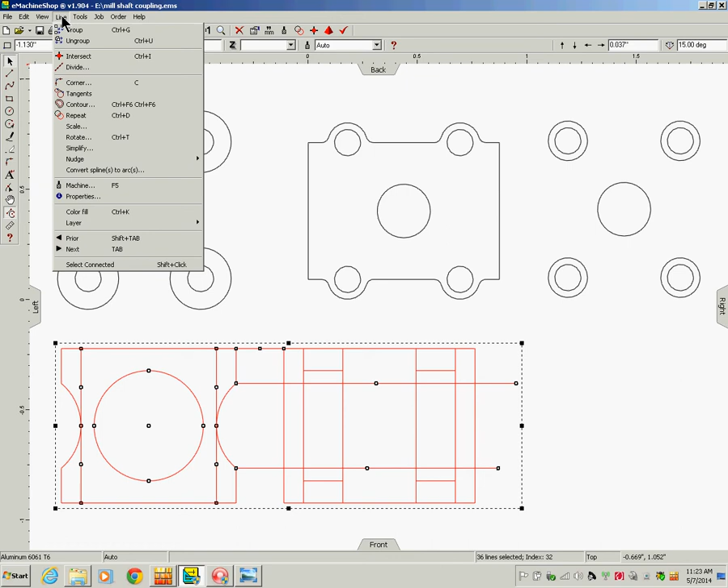So then I'm going to select all this here, go line intersect, and then delete out the lines I don't need. I'm going to hold the control key down and select each line that I don't need.

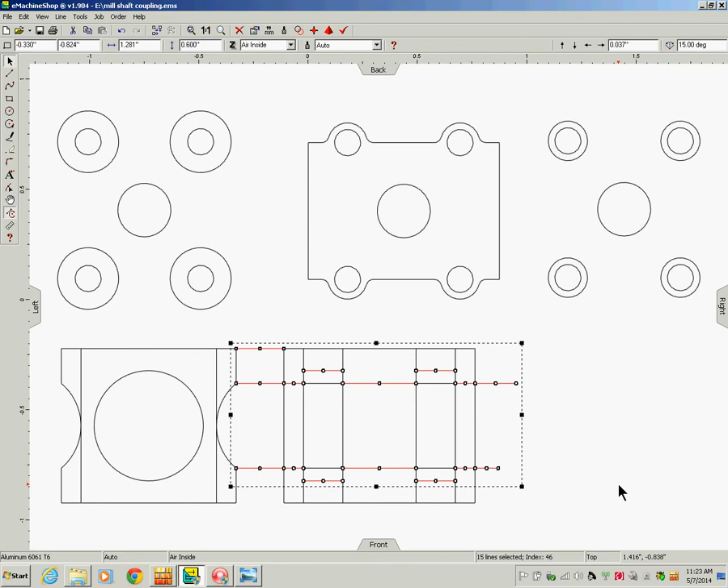And let's see—don't need this one, don't need this one. Alright, we'll delete off those and see how it looks. Alright, that fixed that. Then I'm just going to select this and regroup it, and move it back over.

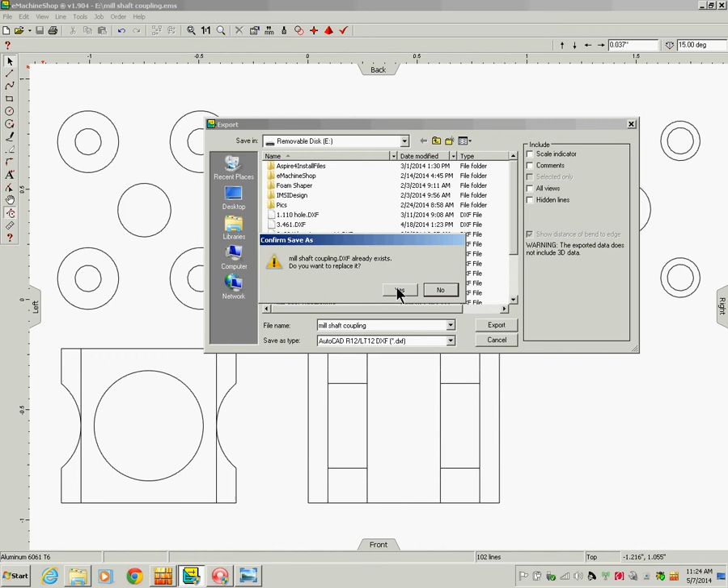So I'm going to take now and save the file. I can just now click save. And then I'm going to export the file with the same name, replacing the other one. Alright, so now we'll go into D2nc.

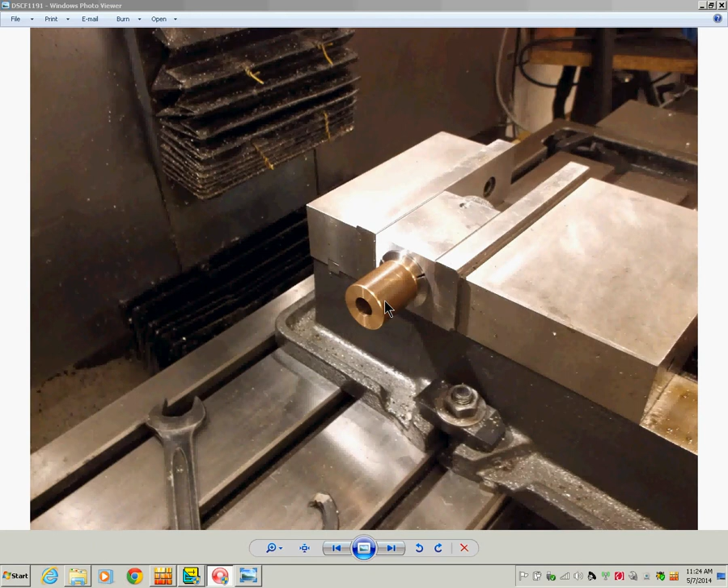Just a quick note, I brought this up to show that what I'm going to do is I'm not going to show all this. I'll just take another photograph afterwards. I've got this in a collet block, and I'm going to square this off.

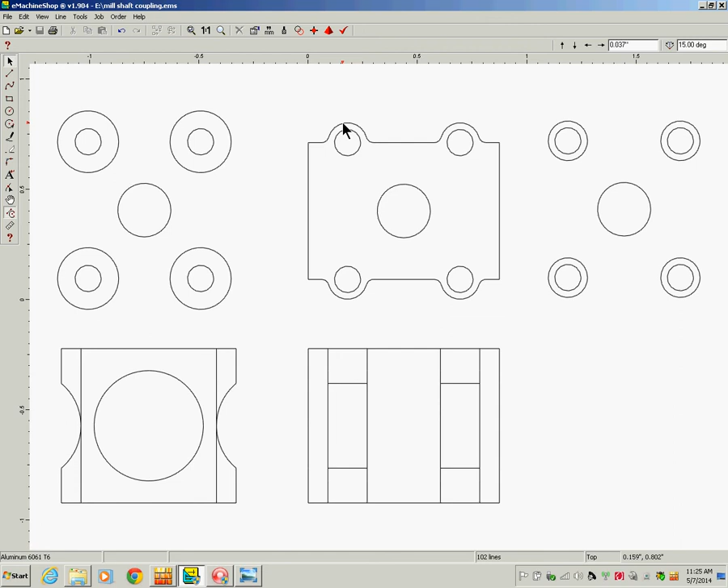The actual block I need per the drawings is 0.8 by 0.7. I'm going to mill this down manually just to 0.850 by 0.750. That way, when I actually mill the part out, I don't have a chance of leaving flat spots on the tops of these radiuses for just the slightest little discrepancy when flipping it over. If I actually made that block 0.8, there's a chance I could leave a flat spot here, so I'll make it 0.850.

So we'll go into D2nc now, if I can click on the right thing, and go ahead and open that drawing. So you click on CAD, import DXF file. It's called mill shaft coupling. I'll open it.

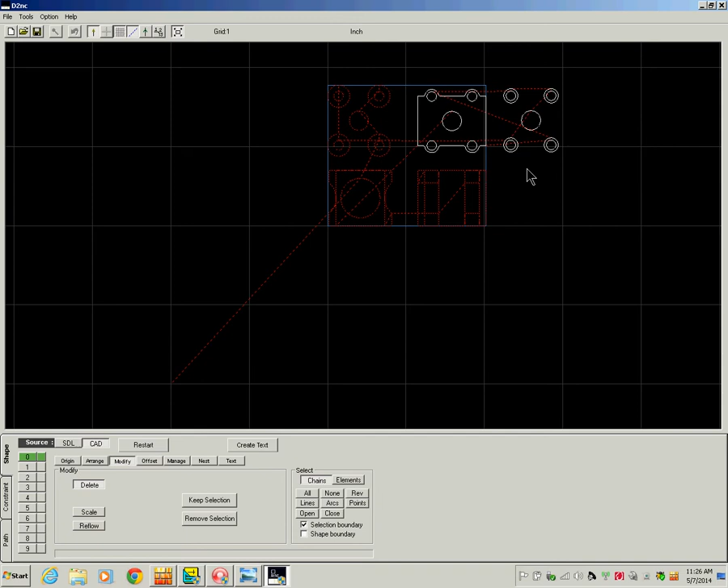It has all of the drawings, and the only one I'm actually going to be working with for making G-code is this drawing in the top center up here. So I'm going to click next to accept it, and then I'll click on modify and go ahead and remove the sections that I'm not going to be working with. I just remove the selection—it doesn't remove them from your actual drawing, it just removes them from what's shown on the screen. Then I need to click origin, and for the origin I want to center.

When I mill this part out, I'm going to use a 16th end mill so I can get some tight radiuses down inside these corners here.

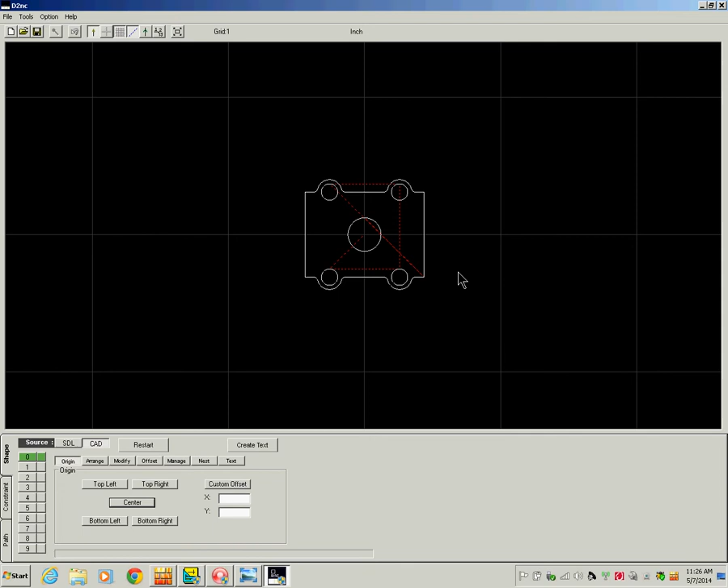I'm going to zoom in just a little bit. It would go a lot faster, and I could make the part quicker if I used an 1/8 inch end mill, but I would really lose a lot of detail in this section right here, and I'd like to keep it closer. So I want to use a 16th, and the 16th I can only go to a depth of 0.230.

That's not going to hurt anything because it's going to leave a section in the center as I flip the part, but I'm coming in with the 1/2 inch ball mill and doing each side, which will clean that up and remove it. So it's not going to cut through half the depth of the part, but it doesn't really need to because of the two side cuts. I hope this makes sense.

Sometimes I just babble. So here's my part. I've selected its location as center. Once again, this circle doesn't mean anything. I put it there for alignment for drilling.

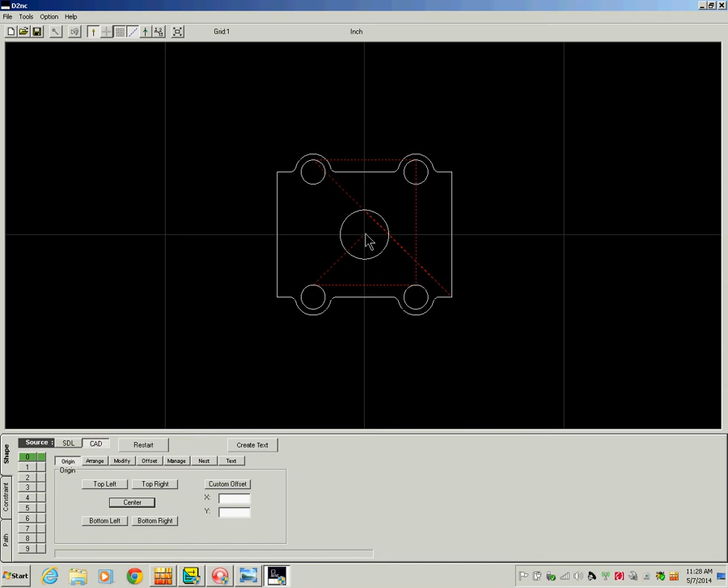D2nc works funny. It will re-zero your part to the first circle if you actually go to a drilling one. Instead of actually taking this point, it will end up re-zeroing it to the first circle. By saying center and doing it with a drill, then it looks at the first circle in the center and it will come in and make these points.

But I've changed my mind again. I'm just going to go ahead and take the 1/16 end mill and pocket each one of these to a depth of 0.1, and then I'll come back and just go ahead and drill them, and that'll be used as a pilot hole to start to drill into, and then I'll drill it through.

Next thing I need to do is go into offset. I'm going to use a 16th end mill, and it's 0.062, and you'll have a tendency to put this 5 in here, and I want to show you a problem that you'll have with D2nc. It does not go 4 digits. So if I put the 0.0625 in there instead of just 0.062, I'll show you a problem.

So I'm going to click on outside and click right here to select the outside and do the offset. And if you notice, it disappeared off the screen. And it took me a while to find this. What's happening is it's confusing D2nc because there's a 4-digit number here.

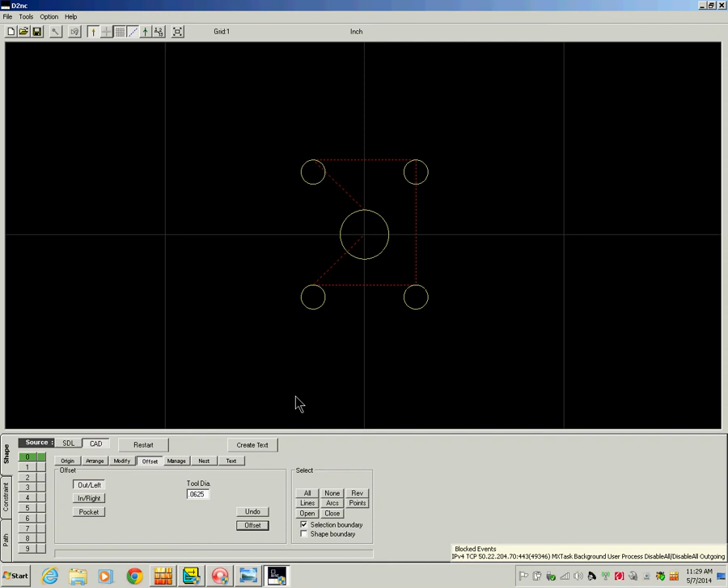Let me go ahead and undo this now and take that 5 off. This has really nothing to do with anything except if you run across this error. If I go ahead now with the 0.062 and select that outside and tell it to offset it, then you'll see it'll do it properly. So if you run into a situation where it just disappears off the screen on you, that's probably what's going on.

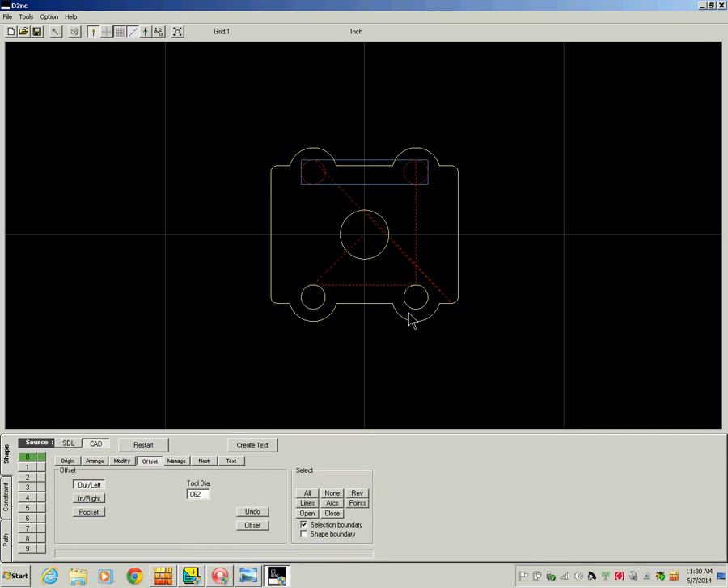Now I want to go ahead and select these 4 circles. Like I said, I'm just going to pocket them down to a depth. They're an inside pocket, and go ahead and offset them. So that's all I really need to do there.

I can go now to path, select contour, local shape, none. I want to go ahead and do the 4 holes first, so I'll select them. I'm going to move that in to the area. I want to say their depth's 0.1. My step, I'm going to take 10 thousandths.

This is first time I've used my high-speed head on the actual ZX45 mill. I made a bracket and a mount and everything to put my high-speed spindle on this machine, and I haven't used it yet, so I figured the small part like this would be a good time to start. So I'm going to go ahead and let D2nc select my feeds and speeds.

It has always been really conservative. I definitely want to ramp these pockets, so I'll let D2nc select that. Now if you see here, this 0.18 is the ramp distance, and it has more than 0.18 there. I'll just delete that last part off. So I've got the ramp as long as possible to keep the stress off this cutter. It's giving me a speed of 8,000 RPM for my spindle, and that seems pretty good.

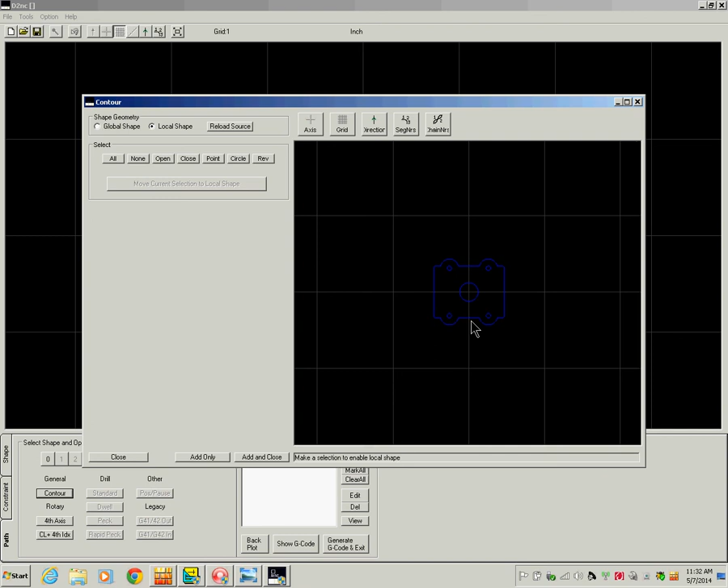Select the outside, move that in. My full depth on this is going to be, like I said, that 16th cutter will only go 0.230. I'm going to take 20 thousandths on this.

I'm going to try it. Like I said, I haven't done any high-speed cutting yet, so hopefully this works out fine.

Going to ramp this, and I'm going to put a pretty long ramp on this. It's saying I've got up to 3 inches, I'm going to put it at 1 inch, just to keep the stress off this cutter.

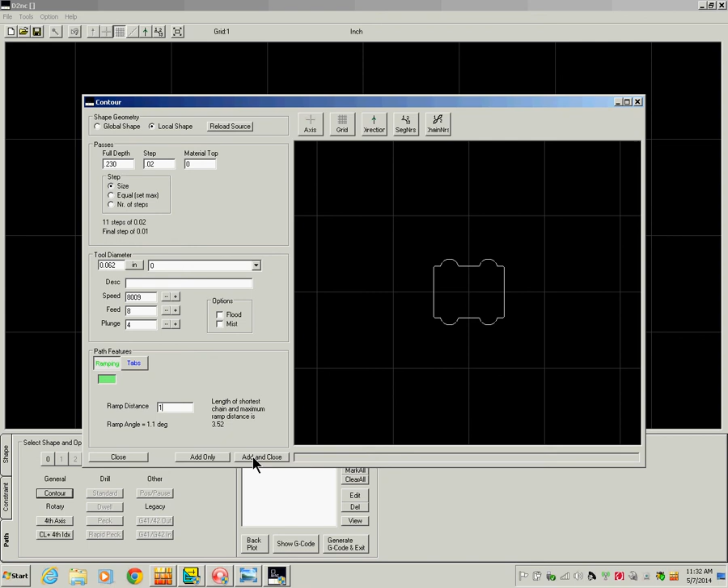Looks like I've got everything okay there. Add and close. Alright, so the first thing it's going to do is pocket out the 4 holes, then it's going to come do the outside contour of the part. And then this same code, I'll just flip the part over and do it again from the opposite side. Hopefully my zeroing is accurate and I don't end up off any, but we'll give it a try.

I'm going to go ahead and generate the G code. If I would have done this in Mach 3 from inside Mach 3, it would have come up on the screen here. I didn't have Mach 3 open because I have so much open on the computer anyway.

This isn't the computer I use to actually do the machine work. This is a computer that's on the internet and runs a bunch of other stuff. But here's my mill. It's going to pop up saying that it's not hooked to the machine, just looking for a piece of equipment on my machine that's not on this computer.

Taking a minute to load because it can't find that piece of equipment. Okay, I'm just going to click reset.

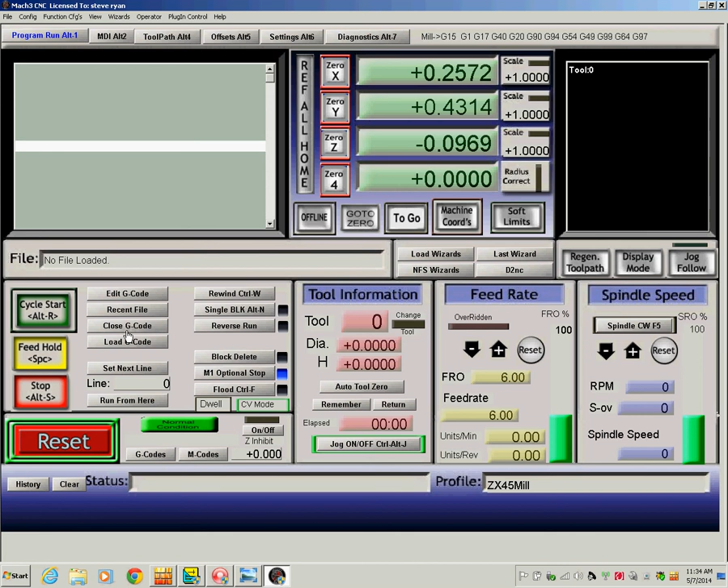If I'd have run D2nc from in here, when I told it to generate the G code, it would have popped back up right in Mach 3. D2nc sends its files over as D2nc.tap. So I'll go ahead and load the files right here.

And here you can see the actual picture of the process I'm going to do.

As far as machining this, I think what I'll do is I haven't got any really good software yet. I'm looking for something to do editing of these videos, and all of this videoing has been a learning curve for me. The first videos I did were really poor quality, and I'm still having a problem with the timing of the video to the sound.

So I think I'm just going to take photographs as I go through, try to take a bunch of them, and then just put the photographs in there after I've done each machine process. I may take a video of it and try to play with it to edit it, but...

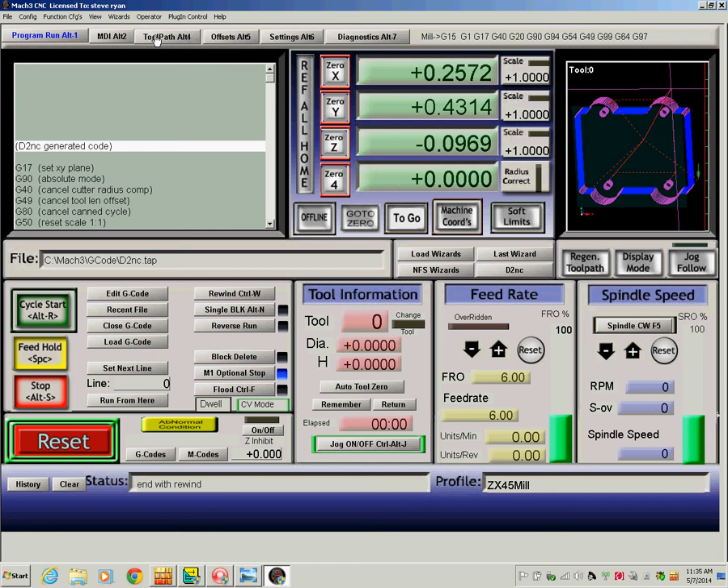For this first part here, I'm just going to go ahead and machine this. I'll machine this from one side after I've squared up the block, then I'll flip the block over 180 in the vise, and I'll machine it again from the other side, and then I'm going to come in with the ball mill and cut the other two remaining sides out.

Then I'll take a look at it and decide at that point in time if I actually want to pocket these out to recess in the bolts.

The more I think about it, for the year that this actual engine was made, they really weren't too concerned with personal safety of people, things sticking out or you could get caught on. So I don't believe they would have pocketed these out and put all the extra effort into making these castings.

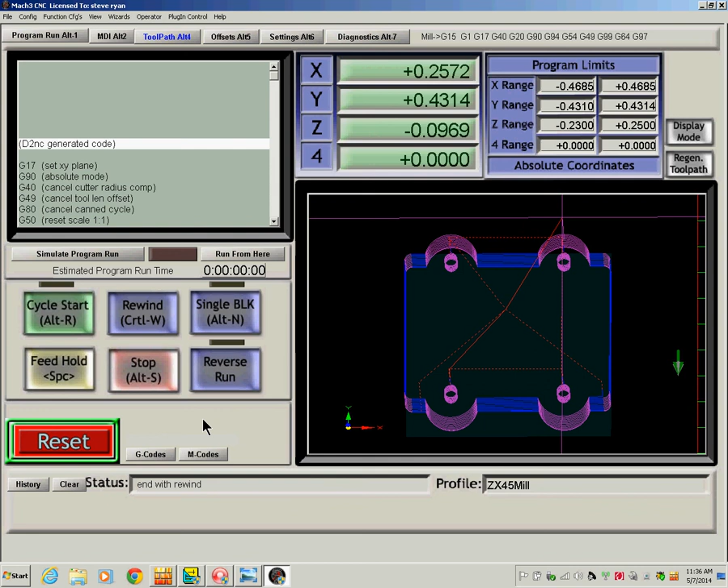So I'm going to take a look at it first, and then we'll go at it later. That's it for this video, and then I'll follow up with photographs.